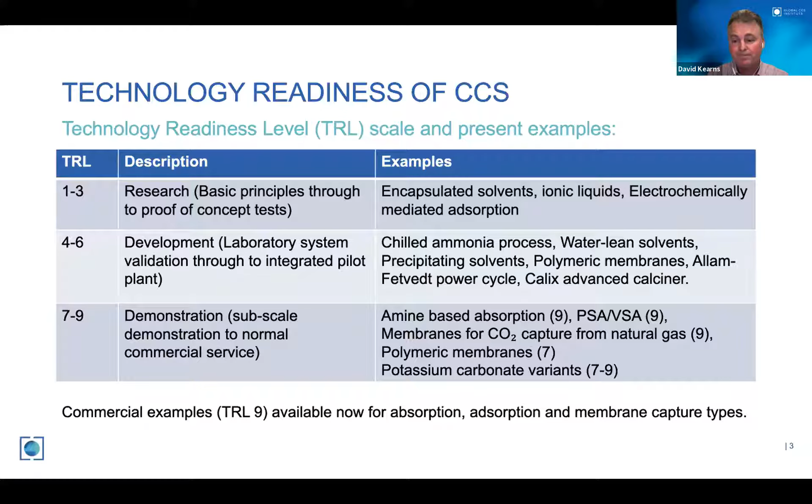The Allam cycle by NET Power is a new power generation cycle that has inherent carbon capture. So effectively, it enables you to produce electricity from natural gas or from gasified coal or fossil fuels, while capturing CO2 in a high purity form as part of it. And a key part of that is that it's using supercritical CO2 as the working fluid for power generation, which is a novel thing to do.

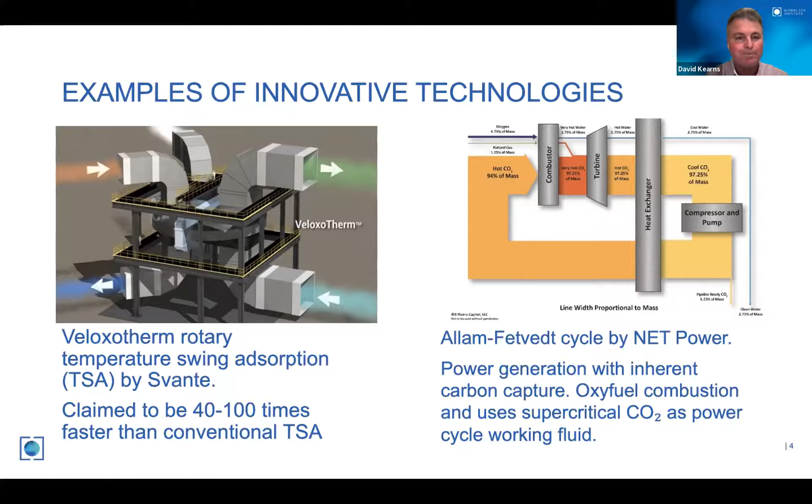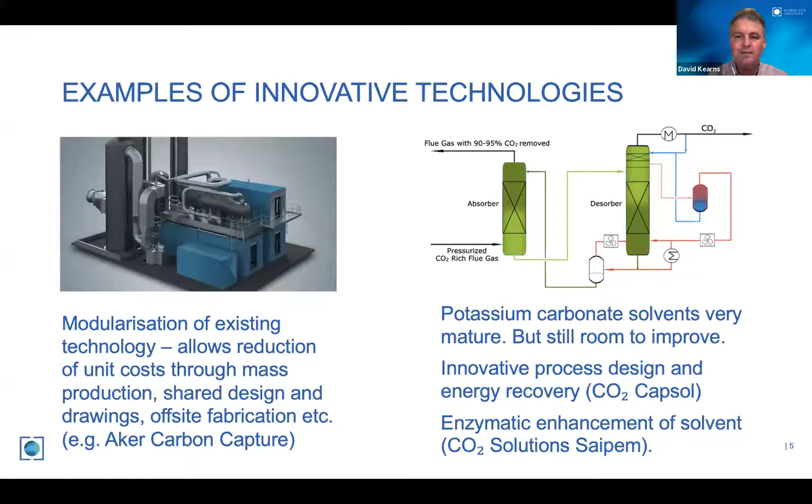So you'll see that things like compression of CO2 and pipelines, they're very mature. They're TRL 9 basically. Truck transport is the same. So these are very conventional things to do, really not very difficult for us to manage. Where we're starting to get into areas that are needing more development at the moment are things like ship design and ship infrastructure.

It's not to say that transporting CO2 by ship isn't being done, because there is a presence of CO2 shipping in the world in the order of 3 million tonnes per annum. But that has typically been done historically for chemical use of CO2, so effectively a utilization. What we're looking at from now on and into the future is bulk shipping of CO2 for storage purposes. And so we're seeing some interesting work emerging from shipbuilders and ship transport companies looking at new models of how do you ship CO2.

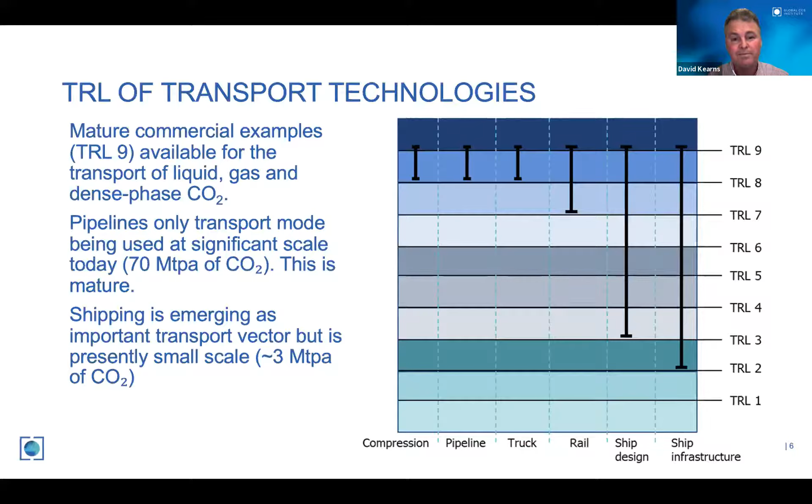Pipelines are very, very mature. There's a very well-established CO2 piping infrastructure, particularly in North America, and we expect that that's going to grow rapidly. In terms of shipping, I thought I'd touch on this a bit more because it is underdeveloped at the moment. So bulk CO2 shipping is growing. What you typically see with ship transport of CO2 is that the CO2 has to be in a liquid form.

Now, liquid CO2 at moderate pressures, say 8 to 20 bar, is quite cold. It's in the order of -50 to -30 degrees C. And so there has to be some work that's done in the source plant to actually liquefy CO2 before you can put it on the ship. There's some efforts being made in improving and working on the loading and unloading of CO2, not only the loading onshore, but also the offloading potentially offshore.

So it's important to note that sometimes the storage site will be an offshore platform operating with an offshore well. And so you have to have the facilities to be able to offload CO2 in those offshore locations. To liquefy CO2, you also need a somewhat higher purity of CO2 than you would need for pipeline transport. So it actually has a direct bearing on the capture technology that you use.

You need to pick one that is able to produce a sufficiently high purity of CO2. Not all technologies are able to go for very, very high purities. So it's important to consider this as part of an integrated system.

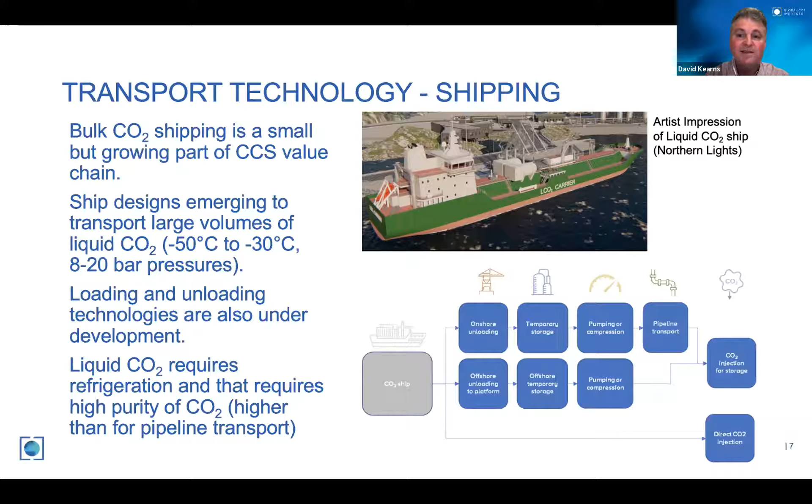In the face of storage, so the final aspect of CCS is getting the CO2 down into geological storage. The technology development is quite mature in terms of enhanced oil recovery. So this is the process of using CO2 injected into the ground to extract oil from maturing oil fields. That's been operating for 50 years now and has a lot of operating history. In fact, that's really the reason why there's a substantial amount of CO2 piping in the world already.

Saline aquifer storage is also mature. It's also TRL 9. It's been done since 1996 for climate purposes. And it's proved that we can inject CO2 into these storages in the megaton ranges. The monitoring has been ongoing for a long period of time and confirming that the storage is indeed permanent.

Some of the less mature aspects are things like using depleted oil and gas fields. Technically, they're mature in terms of our understanding. They just need more development in terms of actual deployments. And then there are areas of unconventional storage, things like basalt storage, enhanced coal bed methane storage. There's no active projects in those areas. They conceptually could be done, but they're not being done just yet.

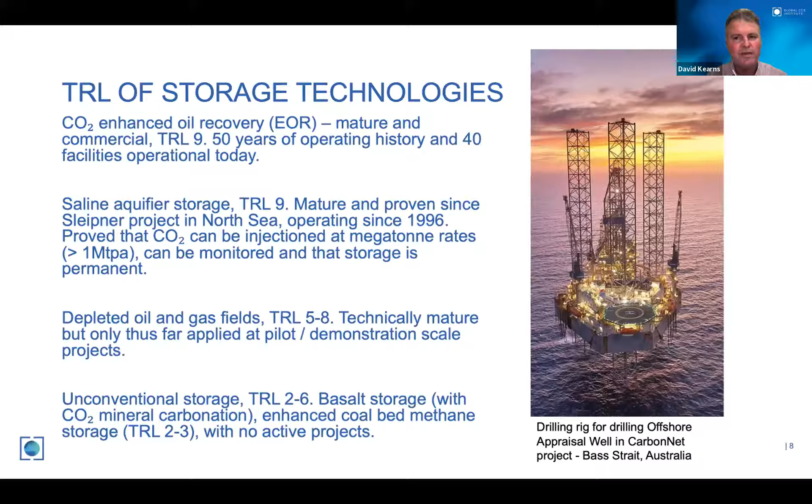So that gives you a bit of a flavor of technology and how it's developing in CCS. So how does this translate into costs? I guess we'll talk about that in a moment. Obviously, improving technology is typically driven by this desire to reduce the costs and be more competitive. Technology goes so far, but then you need to look at some other factors.

Two of the key factors that drive the cost of CO2 capture, so we're back at the capture end of things again. One of them is known as CO2 partial pressure in the source gas. So partial pressure is the volume fraction of CO2 multiplied by the total gas pressure. You multiply the two together, you get the partial pressure of CO2. If you've got a low partial pressure of CO2, it basically means you need to have more energy use in your capture plant, which has a direct bearing on operating costs. And you need physically larger equipment typically to do the same amount of capture. That means you need more capital cost.

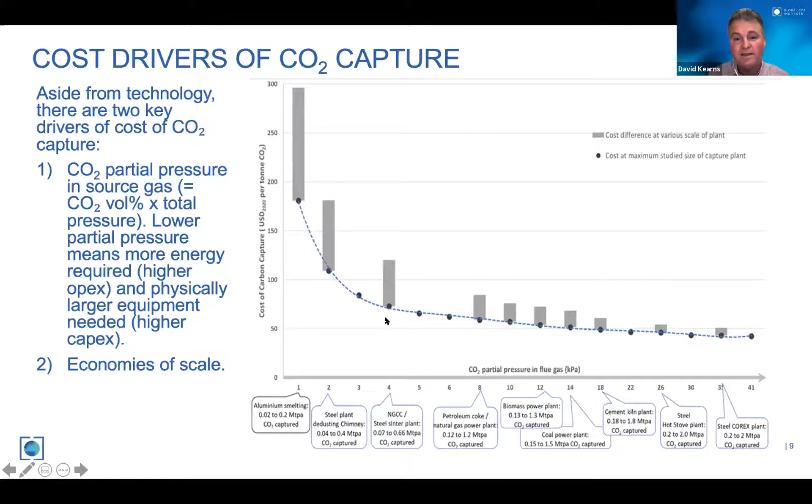There are opportunities to reduce capture costs as well beyond this. So modularization, which I mentioned before, that has direct implications on construction time and on construction costs. It also gives you some economies of scale in fabricating the capture plants themselves. So if you can make 100 capture plants, all with the same design, all in a mass production facility, you're going to get lower costs of fabrication. The plant design and drawing costs are also spread over multiple projects.

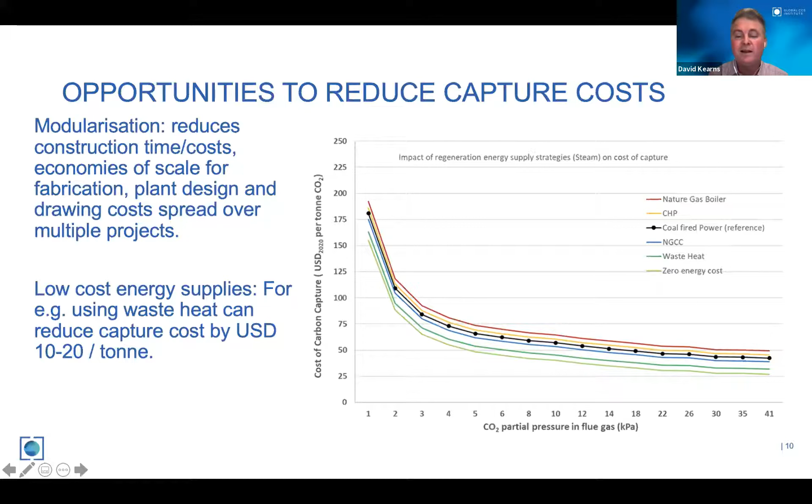And then as you step up through different energy sources, things like waste heat, heat from natural gas combined cycle, so that's effectively taking some steam out of that cycle, all the way up to a dedicated natural gas boiler. So there's a fairly substantial range of costs that you can incur. And therefore, by choosing your energy supply correctly, you do have an opportunity to reduce costs significantly.

Many projects will also try and offset their costs by getting supplementary revenue streams. So for example, selling CO2 for enhanced oil recovery, also getting sources like capital grants, and sometimes regulation of emissions can provide other incentives as well.

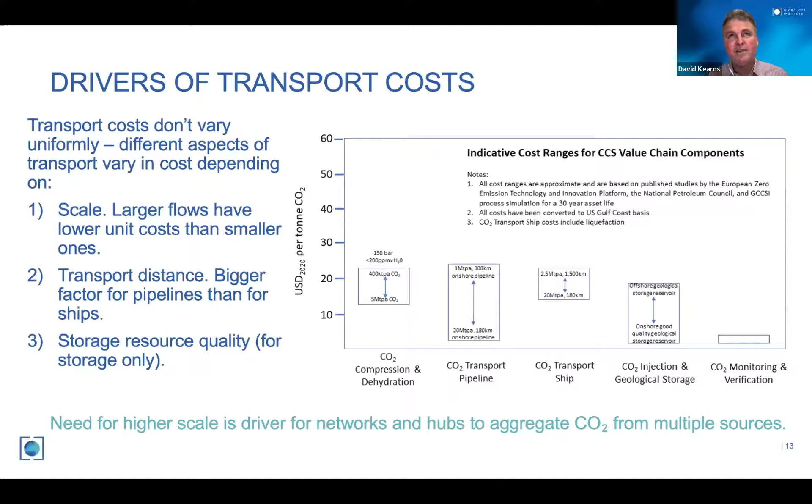One of the things that we have been seeing, and certainly our work has noted this as well, is that there is a really strong incentive for higher scale in transport in particular. The CO2 pipeline bar there, the substantial difference in cost there shows you that there is an incentive to move towards larger pipelines. And so what we did is we actually had a look at that a little bit more closely, about what kind of incentive might that engender.

In conclusion, really we wanted you to get the sense that in costs of CCS there are several drivers. The dominant drivers are technology development. It's particularly dominant in carbon capture, not so much in the downstream industries, although there is an element of it. The source gas from which the CO2 is captured, its partial pressure of CO2 matters. The scale of capture, transport and storage facilities, so economies of scale matters everywhere.

Transport distances matter. And then some of the more prosaic things, as you'd expect, the cost of energy, the cost of capital, and the characteristics of the storage resource. So different storage resources will have different costs of storage. So these factors can all vary widely, and that means that CCS costs can also vary widely.

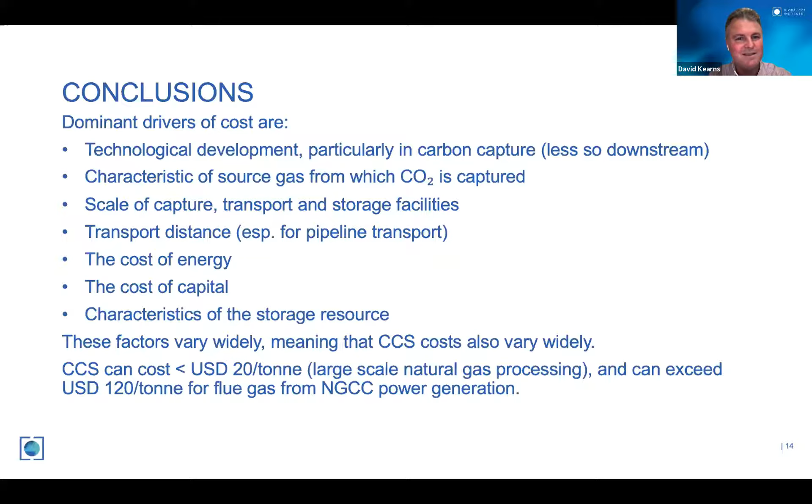We can see costs lower than $20 per tonne, full chain, in certain large-scale natural gas applications, for example, and could exceed $120 in an example like capturing CO2 from flue gas from an NGCC power station. And so when people ask how much does CCS cost, the answer will always be it depends. There's always this range and variation that we see.